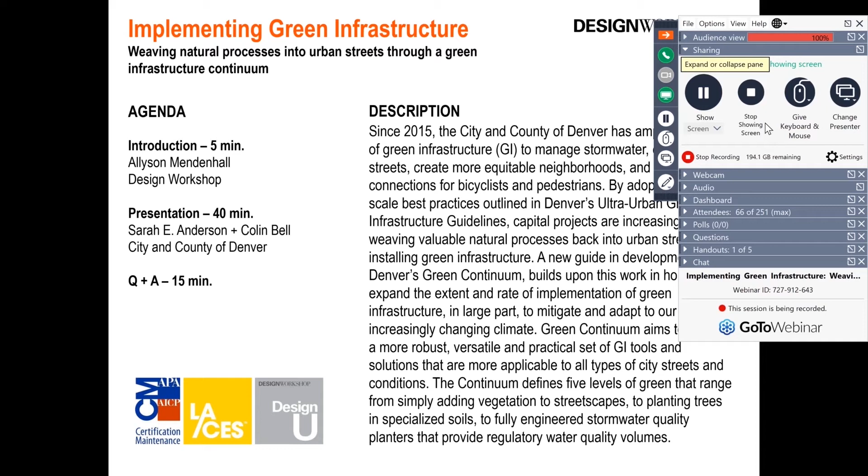When you signed up for the webinar, you saw these learning objectives. Today we will learn about the reasons behind the need for the Green Continuum, about the methodology and modeling behind defining different levels of green, and how the Green Continuum will be applied to city streets and capital improvement projects.

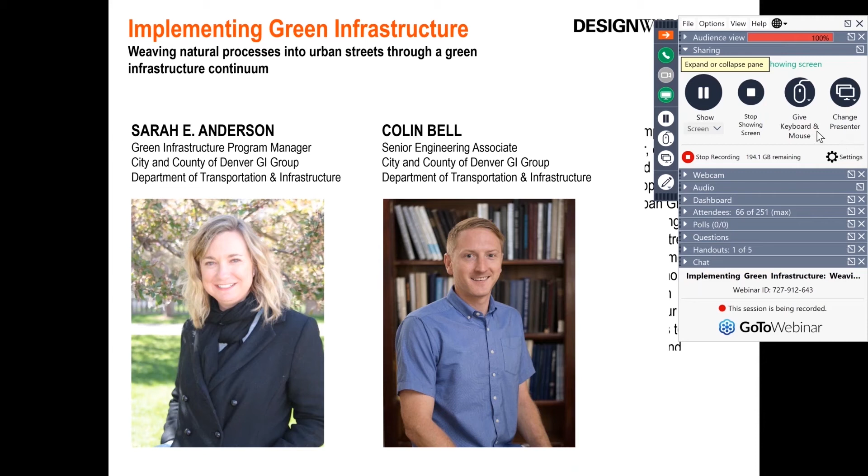Perfect. Well, thanks, Allyson, and thanks to each of you for taking the time to learn a little more about Denver's Green Infrastructure Program, a little bit about where we've been, and hopefully more about where we're headed. It looks like there's about 115 people on this, so hopefully it's an interesting topic versus you're just stuck at home.

So, a little bit about us. The Green Infrastructure Group is housed in the Office of the Executive Director for DOTI. We've just recently switched from being a Public Works Department to a Department of Transportation and Infrastructure. So we are housed in the executive director's office in a group with a fairly awkward acronym, OPLASI, which stands for Office of Policy, Legislative Affairs, and Special Initiatives. The Green Infrastructure Group, or GIG, which we think is slightly cooler than OPLASI, consists of myself, Colin, along with Brian Wethington, who is a landscape architect.

So we're a small but efficient group that is also heavily supported on any given day by a number of super smart consultants. The Green Infrastructure Group is mainly responsible for providing the direction for city decision-making on green infrastructure policy, green infrastructure programs, plans, and even green infrastructure projects. So we'll start pretty basic with what is green infrastructure.

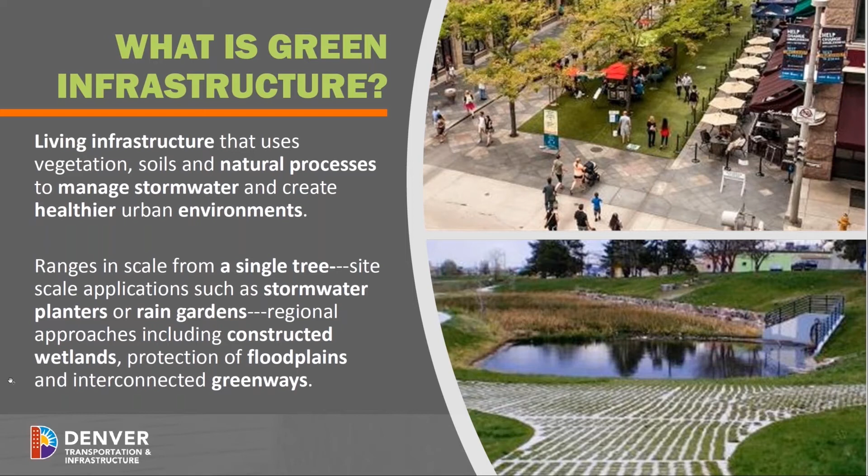So today we'll really focus mainly on the stormwater management and climate resiliency benefits of green infrastructure, but know that there are many. I think one of the most misunderstood elements of green infrastructure is actually the scales of green infrastructure. Green infrastructure ranges from a single tree to site scale practices such as stormwater planters or rain gardens, all the way up to regional approaches, which include constructed wetlands and protection of floodplains, as well as a system of greenways.

Green infrastructure works on all these scales in Denver and likely everywhere in the world. Each one of these pictures are recent projects completed in Denver, ranging from the site scale practices of the street-side stormwater planters on Colfax and Josephine to the planters on Brighton.

We also show sub-regional and regional facilities, one outside of a DPS school. And some of you at Design Workshop might recognize the aerial of the City Park golf course and the redesign, in which Design Workshop played a giant role.

I find that people think of green infrastructure as only in those smaller practices and really kind of pigeonhole green infrastructure into this idea of just rain gardens or green roofs, but they fail to recognize the flood control benefits of these larger regional scale green infrastructure systems.

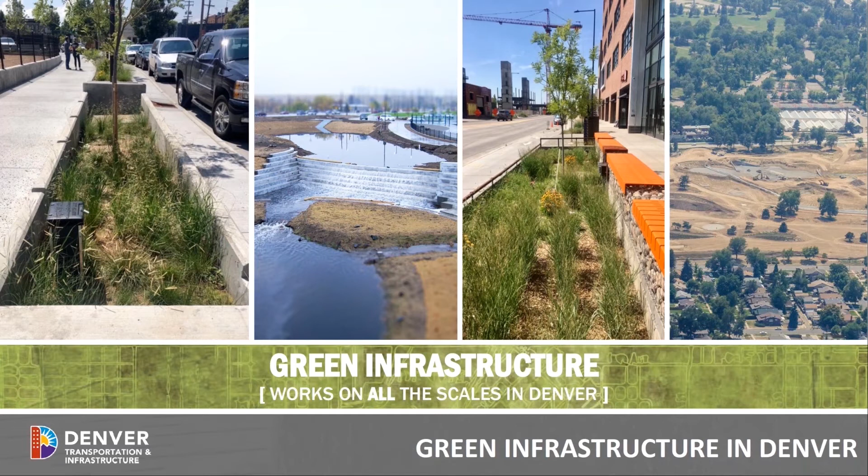And despite all of the benefits of green infrastructure, we're losing it, I think globally, but certainly locally at a pretty alarming rate. Currently, Denver is 49% covered in impervious surfaces, 72% of which is untreated, meaning that 72% of the runoff from those impervious surfaces makes it to a nearby waterway without treatment.

We recently completed, in 2018, a multi-year impervious cover forecasting model with CU Boulder that projected the impervious cover change in Denver and forecast that it would grow from 49% to 61 to 67% by 2040. That's the equivalency of 8 square miles of new impervious area. Obviously, this would have tremendous impacts on stormwater quality and quantity, urban heat, vegetation stress, and certainly community livability.

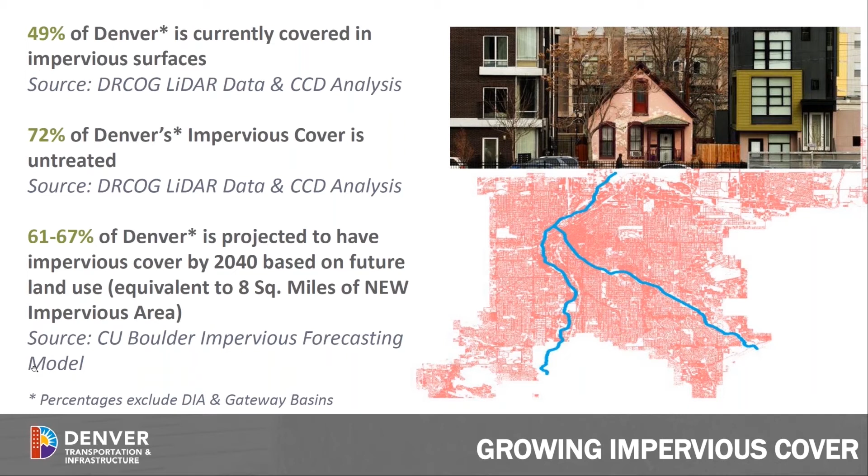The Green Infrastructure Group is really focused now—we feel like the stormwater management story has been told and is fairly well understood, but we're currently focused on trying to better tell the story centering around urban heat.

Denver has the third worst urban heat island numbers in the country. It's not as noticeable here as in other places because of the nighttime temperature drop when the sun goes down—I guess one of many benefits of being a mile closer to the sun. But it's a problem, and it's going to continue to be a problem and become an even bigger problem with those projected impervious numbers that we showed on the previous slide.

And so with the loss of green, we lose all those benefits—the loss of vegetation's evaporative cooling powers, and really just the pure comfort of being in the shade. I mean, I've said this before, I think in every presentation, but we all know the difference between not standing under a tree and standing under a tree, and how we feel and experience heat.

And then we compound those problems because we replace the green with these heat sucking materials that trap heat at the surface and then radiate it back. And this heats up the environment.

And then we cope with that, and our response to that is by turning up our air conditioners for those of us who are lucky enough to have those kind of systems and afford them, which then leads to greater fossil fuel production because that's how your air conditioner is powered, which leads to greater greenhouse gas emissions. And we end up in this giant negative feedback loop that we just can't seem to get ourselves out of.

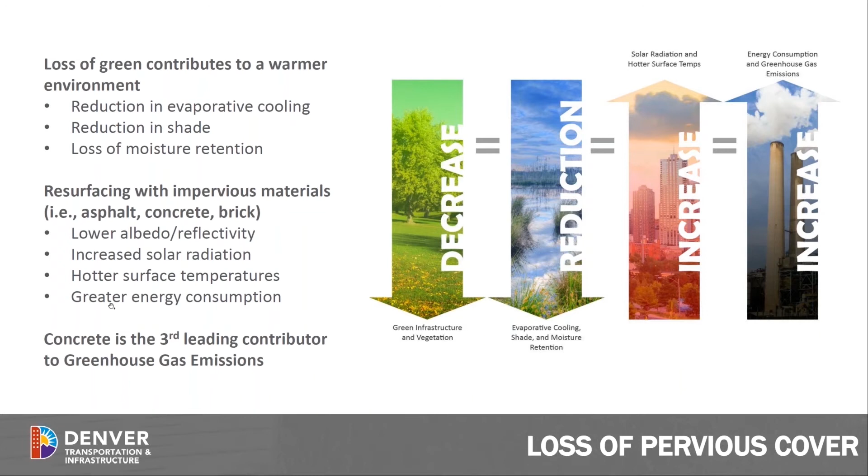We all know, whether in Denver or anywhere in the country, you feel it getting hotter. In Denver, we've seen a 2.5 degree increase in the last 50 years. As you can see in the graph, by mid-century we could have more than a month's worth of days over 95 degrees. Every time I say that, or look at that graph, it's hard to believe I'm saying that about Denver, Colorado.

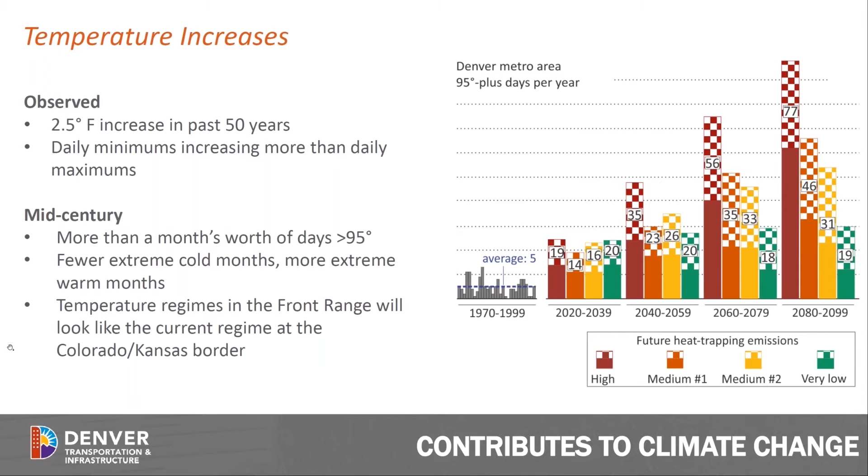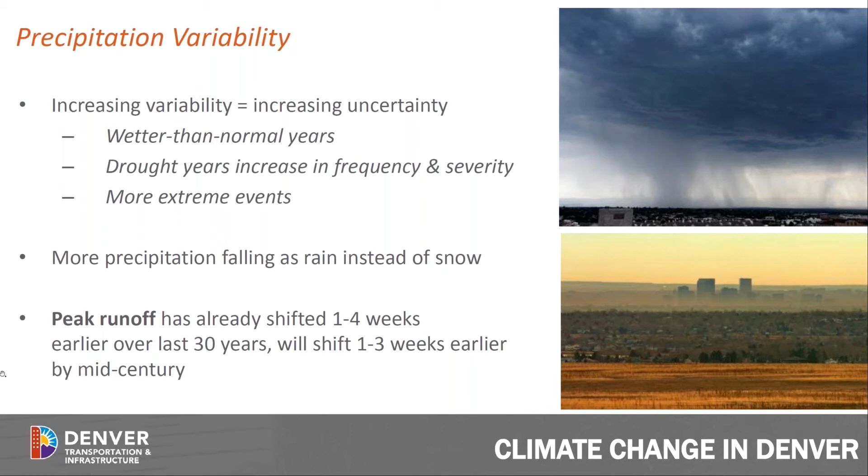With higher temperatures and warmer air, climate change models also forecast more frequent and intense storms, followed by prolonged periods of drought in Colorado. More of our precipitation will fall as rain instead of snow, and our peak runoff has already shifted up to 4 weeks over the last 30 years, and will continue to do so. In our conversations with Denver Water, that has a lot of impacts and logistical problems to be worked out for our water supply, storage system, and reservoir system.

The good news is that green infrastructure can really help mitigate the impacts of our warming climate. Tree canopy and other green infrastructure practices provide shade, which can block up to 70 to 90% of the sun's rays from reaching the ground.

Evapotranspiration is also at work. Leaves are little mini air conditioners, which remove the heat from the air and evaporate the water. We've had trouble getting to the bottom of this number, but I've read that this can really help reduce summertime temperatures by 2 to 9 degrees.

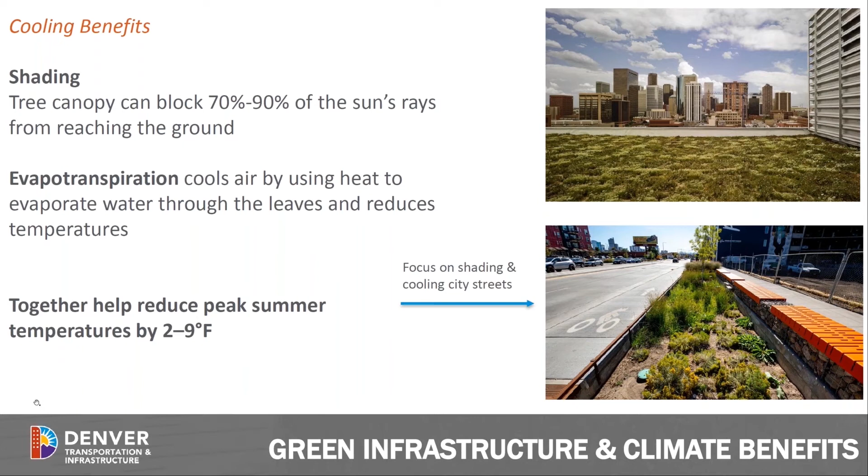Green infrastructure can also address the other big factor for Denver of climate change, which is precipitation variability. Green infrastructure can help manage stormwater by absorbing rainfall and reducing flooding and peak flows. You could also design these systems with drought tolerant, thoughtful, native vegetation that should be able to withstand both extremes. By doing so, we also reduce our irrigation demands and hope to recharge groundwater supplies.

You can see in the two pictures on this slide large-scale regional green infrastructure practices at work in Denver, handling precipitation variability. These pictures are of the Stapleton Greenway before and during the 2013 historic floods. Fortunately for Denver, the storm parked over Stapleton for about a week, and dumped about 11 inches of rain. Had it parked almost anywhere else in Denver, we'd have a much different story. But Stapleton was designed with these regional green infrastructure facilities to handle such an event.

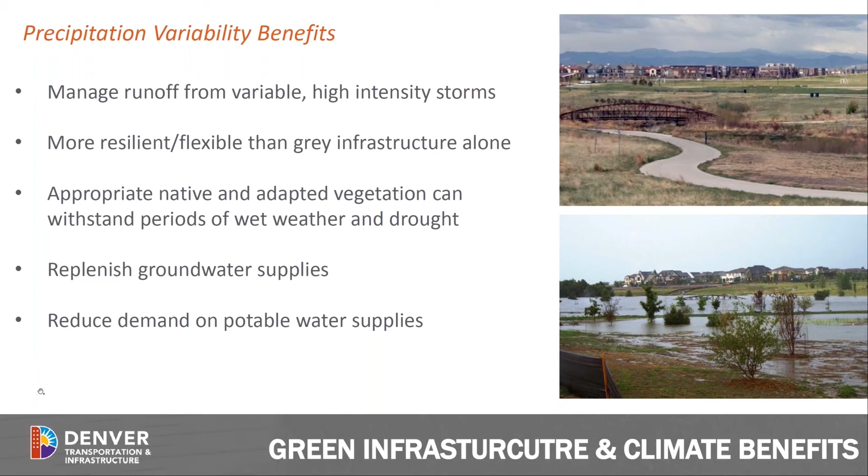Over the last 7 years, we've developed a number of planning initiatives to elevate Denver's use of green infrastructure, not only to manage stormwater, but also to create a more resilient and equitable Denver.

The first large planning effort we dubbed the scorecard. It was developed before green infrastructure had any dedicated funding for a capital program. This data-driven effort prioritized the basins in Denver most in need of green infrastructure based on a host of primary and secondary principles and data collection. The primary principles were focused on stormwater quality and quantity, while the secondary principles factored in things like park density, urban heat, and income levels. These were all problems within the urban environment that we thought green infrastructure could address in some way.

We collected all this data, threw it in a funnel, and came out with this heat map, which identified 6 of our highest priority basins, shown in red, along with 5 medium to high priority basins, shown in orange.

And so the scorecard kind of told a story that if the program had money, we knew where we would invest it first and the benefits that could be achieved. I'm proud to say this map was pretty useful and was really shopped around with executive leadership and to city council.

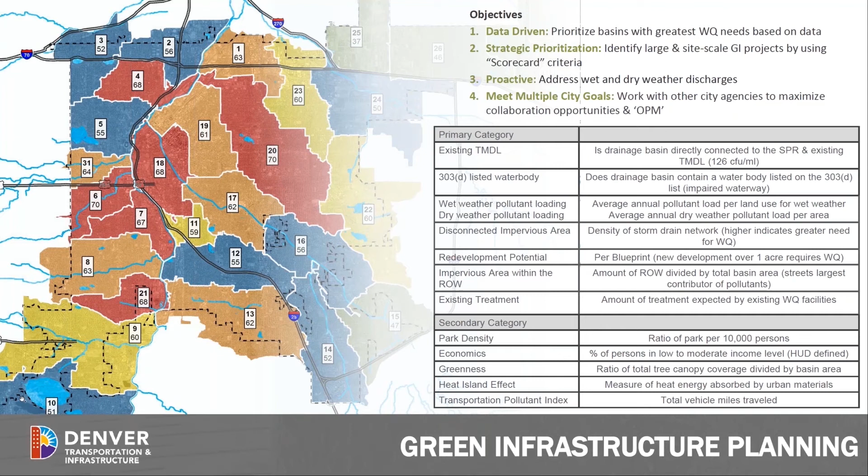Another planning effort that has been fairly successful was the development of the ultra-urban green infrastructure guidelines. When I started, Denver was desperately in need of guidance for BMPs more suitable for tight urban spaces. A lot of the guidance centered around BMPs that were more suitable for development sites and certainly not linear transportation projects. So this guide identifies a number of BMPs that are really suitable for those areas.

Through the development of this guide, I'm proud to say that we've completed, although we're a bit behind the times than the rest of the country, our first green corridor on Brighton Boulevard. It has over 100 street side stormwater planters, and we also have another 300 or so street side stormwater planters either in design or construction.

Together with the ultra urban green infrastructure guidelines and the scorecard, our next step was to create the green infrastructure implementation strategy. This document really is kind of our master plan, and it focuses on those 6 red basins and the 5 orange basins. It's really the only basins we took to this planning level. You can see the map on the lower right-hand side that identifies our regional opportunities.

We worked in partnership with our Parks Department to identify parks that would be suitable for these more engineered large-scale green infrastructure practices. And then you can see the yellow highlighted is where we've identified streets suitable for some of the practices outlined in the ultra urban green infrastructure guidelines. This really is leading how we prioritize our capital improvement program.

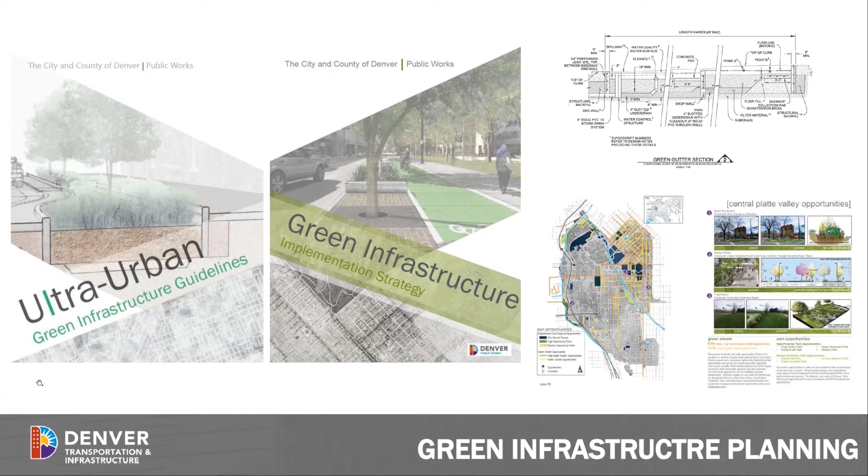Through these previous planning efforts, we have been pretty successful and built a number of green infrastructure projects, both through our program and as a city over the last 5 years. We try, and I think we've been successful on each project thus far, to always have a partner, in particular a funding partner. So we've been able to really stretch that $22 million, and we have a lot more money dedicated to green infrastructure by doing so.

However, as we build more of these projects, we find that they tend to be expensive. The design costs are high. They take a great deal of time, both from the design and construction standpoint. They can still have some utility or space constraints that are hard to overcome in our urban environment, and often lead to this kind of all or nothing approach.

So as a group, we've been focused on really thinking about simpler approaches, easier and cheaper to implement, that could more rapidly respond to our warming climate, because climate change is no longer if or when it will happen, it's happening. And so we want to ramp up our efforts, and what's the best way to do that?

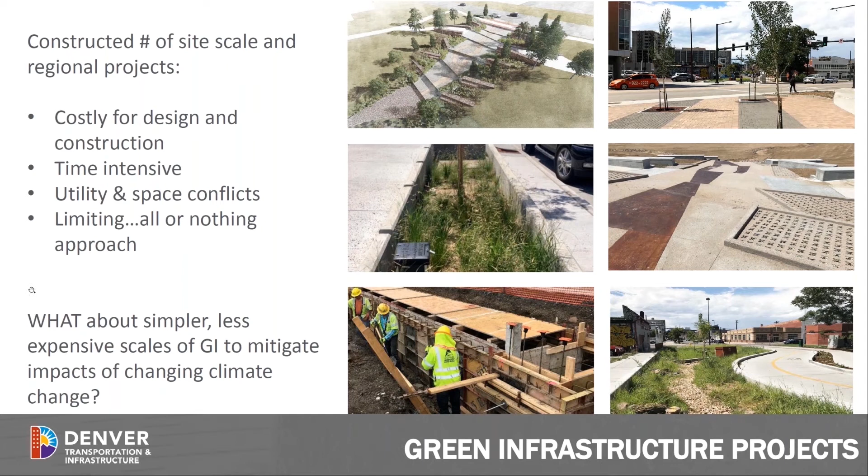And so while we do that, we also want to do a better job of defining all the co-benefits of green infrastructure, so that we can really stand up a greater citywide approach to implementation of green infrastructure to address our warming climate. And that's where Colin comes in. He's modeling the benefits of these smaller scale green infrastructure best management practices in a planning effort that we have dubbed the Green Continuum. So Colin, with that, I'll turn it over to you.

Thanks, Sarah. Right off the bat, Sarah introduced this concept of green infrastructure working across all different spatial scales. We always talk about the smallest scale being planting a tree, and the largest scale being the whole greenness in the urban landscape. In between those scales, at the city we have three thrusts of things we can do: we can work on sites, we can work in streets, and we can work on regional projects.

So those are the three bins we think about for green infrastructure, especially in terms of spatial scale. But as Sarah alluded to in the intro, there are other scales we can use to measure and evaluate our projects and help us select them. So I have a bunch of other scales we want to measure and quantify to show how green infrastructure is working.

For example, stormwater performance. If you think about volume retained at the city scale, a large regional pond with a ton of detention may seem to perform better than a tree. But at a smaller spatial scale, if you're standing under the tree canopy and the tree is intercepting and evaporating all that water, you start to think about performance a little differently. So within these spatial scales, there are all these other scales.

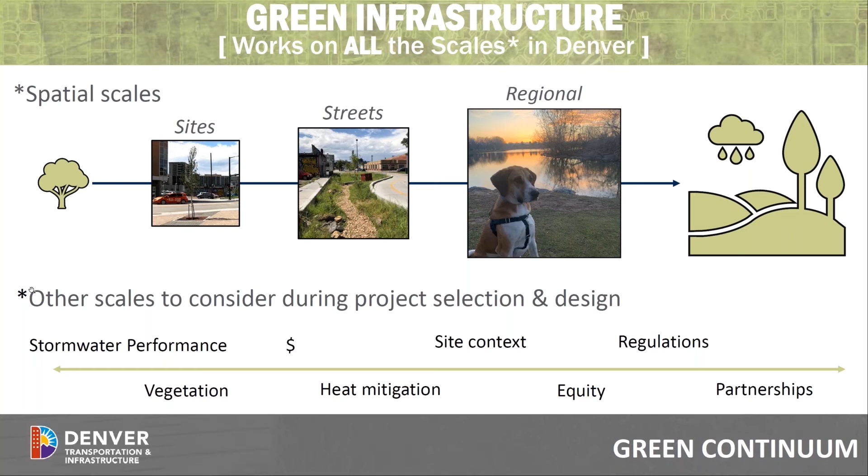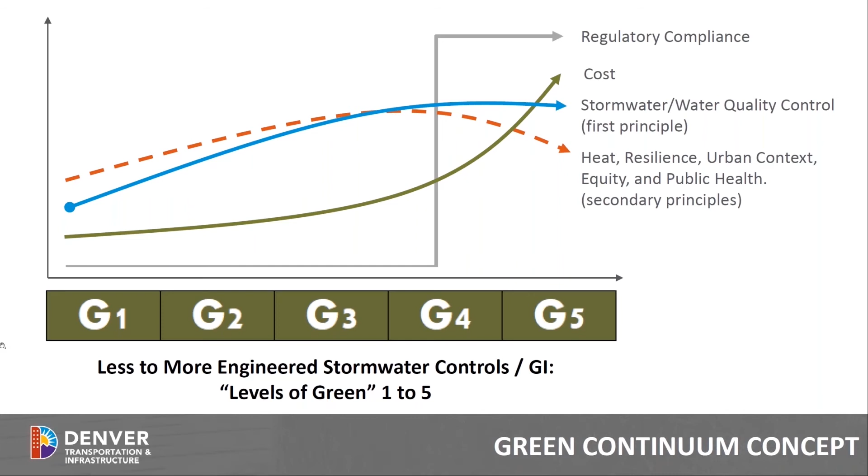So what I'm going to talk about today is that exercise of drawing that arrow, the blue arrow, for our first principle of stormwater, water quality, and hydrologic performance on our green continuum—beginning to quantify and put numbers behind that arrow.

The way we see it, we can start with design practices, things that we can do. The continuum is going to apply globally, but we're thinking about it in terms of streets and right-of-way projects for now. So what are some design practices we can include in our projects?

Things like, how do we maximize our pervious area and include healthy vegetation? How do we minimize our directly connected impervious area in our design? And then, how do we also provide some sort of storage—maybe surface and ponding storage, or water storage in the subsurface and engineered media. We see that conceptually we're moving from level of green 1 to level of green 5 as we build out these different design practices.

So the first part is to identify these things we can do. Then we want to quantify them as a site or project metric. If we were curious about designing to maximize pervious area, we'd quantify that with percent impervious cover on our site, and we can quantify the percent of impervious areas that are directly connected to our drainage system explicitly.

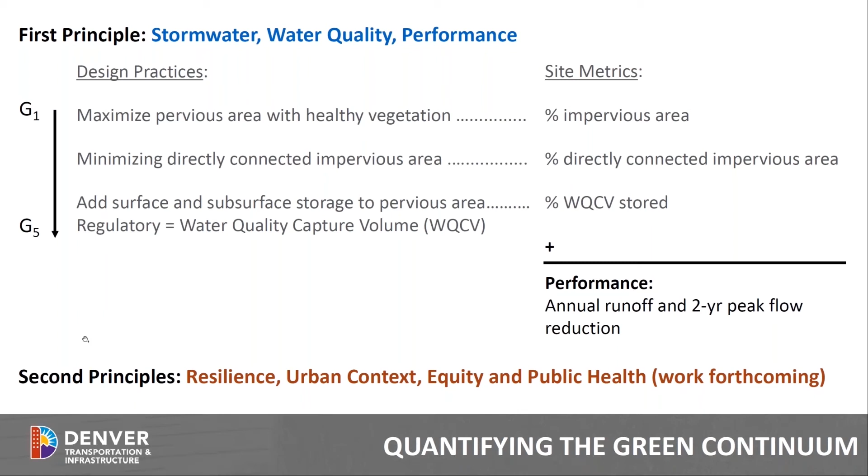So now even more specific, we did a modeling study to look at all of those quantities on the previous slide. The purpose of the modeling study was to look at our design practices and say these design practices fit into a given level of green. So we want to give a level of green for each of the design practices. That's the first outcome.

The second outcome is for all levels of green, even those that aren't regulatory, we want to show that they have value - hydrologic and community value. This modeling study was done just for streets and the right-of-way, but we have similar ongoing work for private properties, which we call sites, and maybe someday we'll build one out for regional projects.

So what we did is we chose a typical street cross section and a suite of design practices, and then for each of them, we quantified performance metrics: annual runoff reduction, 2-year peak flow reduction. We looked closely at the performance and said, how do these design principles separate, and how can we file them into our different levels of green?

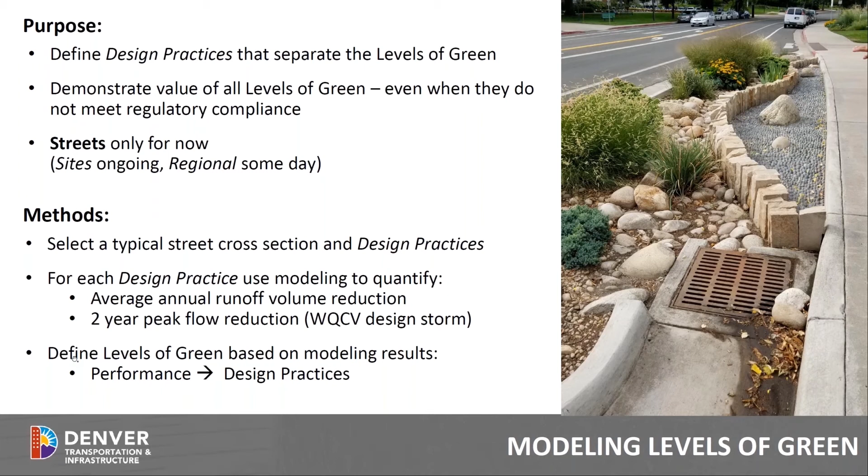So this is an overview, a plan view of the SWMM modeling that I did. SWMM is the stormwater management model, an urban hydrologic model. Basically, we took a plan view of a typical street, 400 feet long and 40 feet wide, and turned that into a SWMM modeling environment.

Runoff from the road moves down towards the gutter, where it moves along the gutter until it reaches the inlet. Similarly, rainfall that lands on the walkway moves through the landscape zone of the street to the curb and gutter, where it ultimately moves down to the inlet.

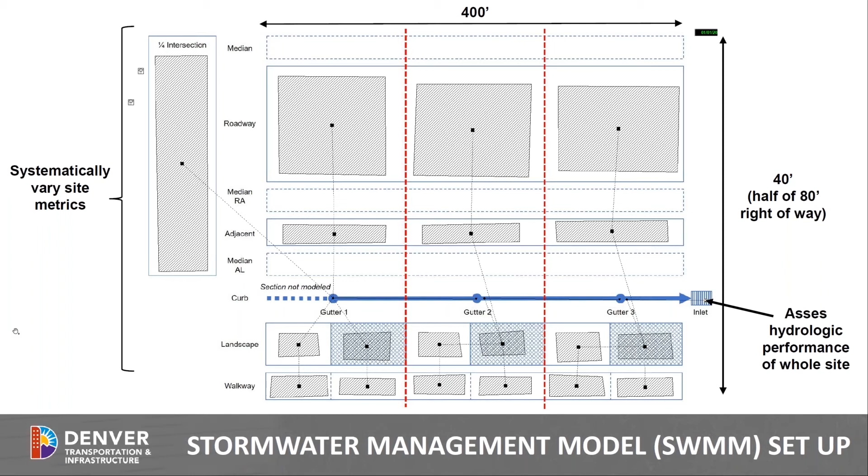With SWMM, we can systematically change the properties of this hypothetical road section so it reflects those site metrics and also reflects those design principles. So we can use it to represent our different principles, and then ultimately assess how our different landscapes perform, en masse, the whole landscape together, by looking at flows into the drainage system.

The types of design practices we integrated into SWMM were, as mentioned, first we looked at different levels of impervious area. The way we were able to conceptualize this in our typical street cross section is that our landscape zone, highlighted here with the red parallelogram, could look a number of different ways. It could be completely paved, as in the image in the top left.

It could consist of trees and tree grates. It could consist of trees planted in landscape islands that are not as small as the tree grates, but also not necessarily large, all the way up to a continuous, pervious tree lawn. Basically we varied how vegetated our landscape zone is across this gradient, influenced by forestry regulations and other design standards in the city of Denver.

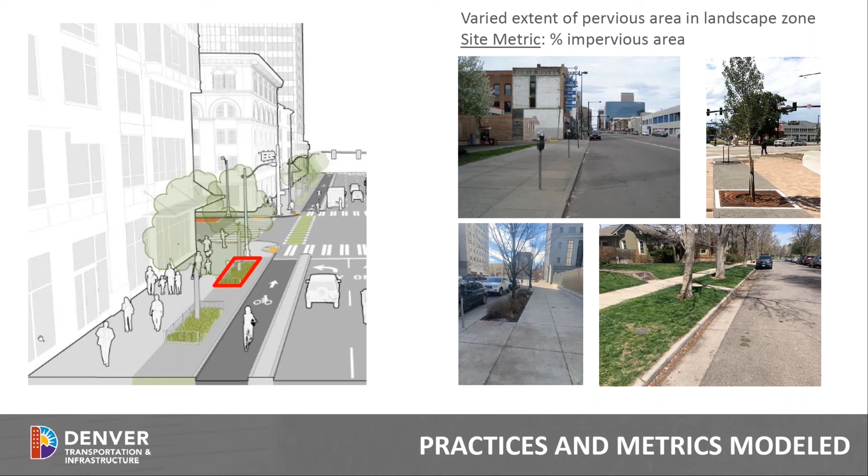So that's one thing we did. The other thing we did is, in addition to varying the footprint of the pervious area, we varied the depth and connectivity of that pervious area. If you look at the dashed red line, that represents a cross section in this right-of-way, and the cross section is what's shown in the diagram on the right. Essentially what we did is we tweaked this landscape area so that it existed at different elevations.

So we looked to see, what if the landscape area is completely hydrologically disconnected from the walkway - what if it's got a curb all the way around it and flow can't enter? What if we put this landscape area at grade with the walkway, so lateral flows could flow in, but there's no storage, so it would flow out on the other side? What happens if that landscape area is a little bit depressed, maybe 2 inches, maybe 4 inches depressed? How does that affect our runoff?

We also looked at depressing it so much that flow from the drive or the actual street could also enter the landscape area. What if the elevations were equally level, so that way flow would kind of flow in and out of the landscape area? What if we provided 2 inches of storage, 4 inches of storage?

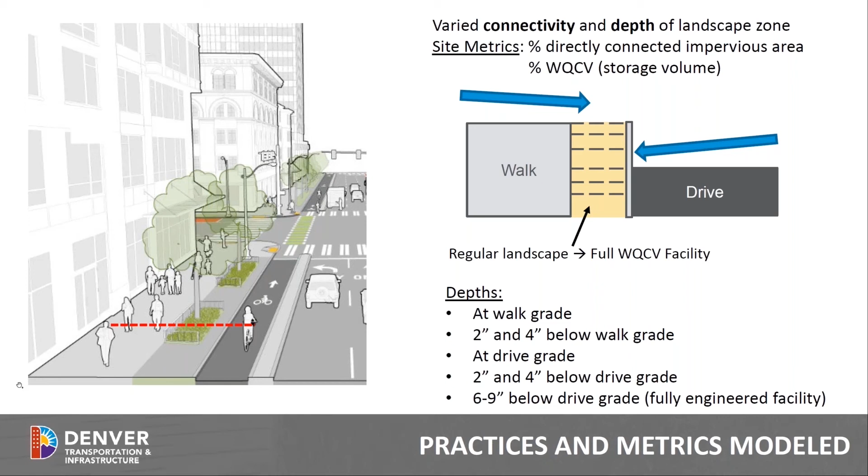All the way up to, what if we provide enough storage so that our landscape area becomes a fully engineered, street-side stormwater bioretention facility that meets engineering design guidelines? So a range of both the footprint of the impervious or pervious area, as well as the depth and connectivity.

We had a bunch of model simulations, shown here on the left. Each bar plot represents a different configuration of our pervious landscape area and its depth relative to other areas in the road. We quantified, over 10 years, what was the modeled reduction in runoff. By looking at these different interventions, we were able to parse out what defines different levels of green. That's what you see here on the right.

It's a synthesis of all those bar plots into conceptual levels of green. For example, the first level, G1 in gray: if we maximize our vegetated pervious area in the landscape zone, we can expect runoff reductions around 5 to 10% and peak flow reductions around 5 to 15%. That's our design principle for level of green 1 and its expected performance.

For level of green 2, if you connect your walkway to that pervious area, your performance in terms of runoff and peak flow jumps. Now we're at 5 to 30% for runoff, 5 to 40% for peak flow. That's level of green 2.

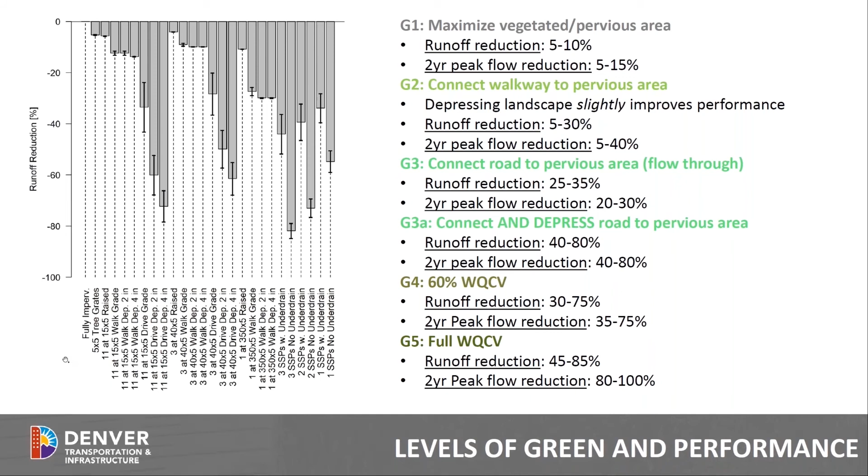Another finding: when you build these bioretention systems, or street-side stormwater planters, with under-drains, your actual runoff reductions are a lot lower, because the under-drains typically go to the storm network and collect this water, leaving less chance for infiltration.

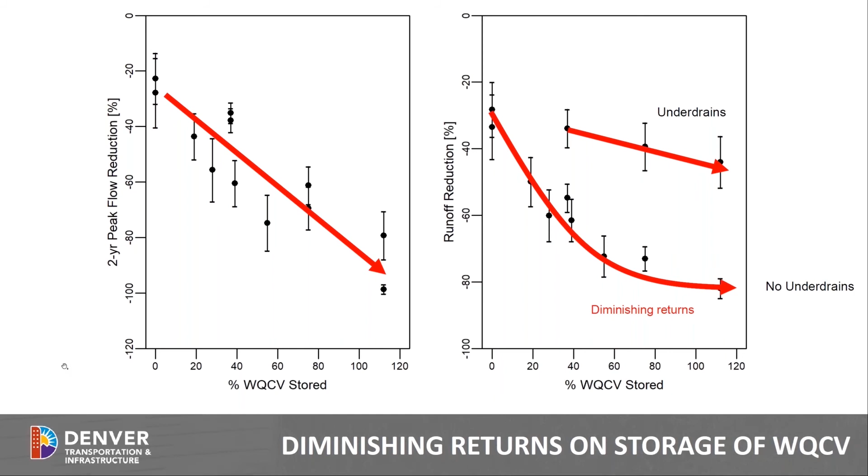Okay, so that's how we quantified the stormwater principle of the green continuum. Now let's talk about how we are, and plan to, apply the continuum to our streets. The first application was for city capital projects.

There could be 2 potential applications. One is that our Green Infrastructure Program could specifically fund construction of these facilities throughout the city. Another is that if there's a right-of-way project interested in green infrastructure, they now have this resource available to build a level of green 2 or 3 that they can give to their consultants.

Our plan is to get some of these installed with capital dollars, build them, and monitor them. If we see that these are really working and we feel confident about them, eventually we could turn it into policy where city projects aren't just opting into building a level of green 3 flow-through planter, but are required to. That's down the road though.

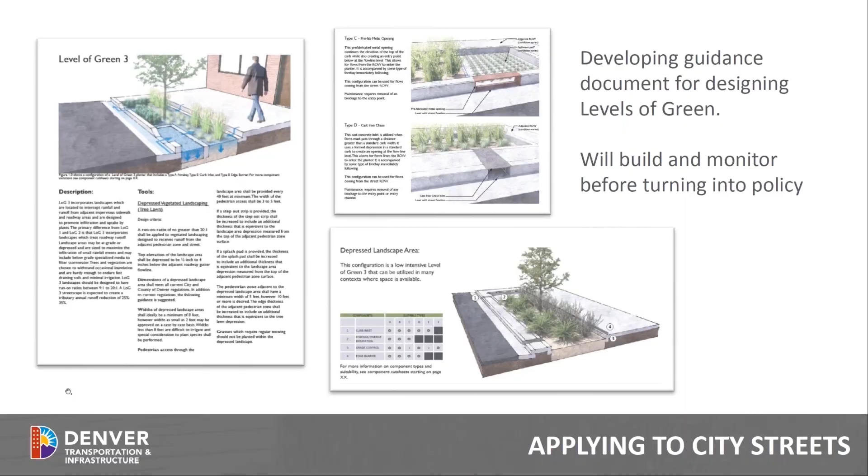In Denver, the Mile High City, we have this planning conceptual project called the 5280 Loop, a conveniently engineered 5.28 mile connectivity corridor linking different downtown Denver neighborhoods. This is an example of a project where there's going to be a lot of people. It probably won't trigger regulatory compliance, but that doesn't mean we shouldn't build in green infrastructure so it can provide all the stormwater benefits, urban canopy, urban heat, and resilience benefits we expect.

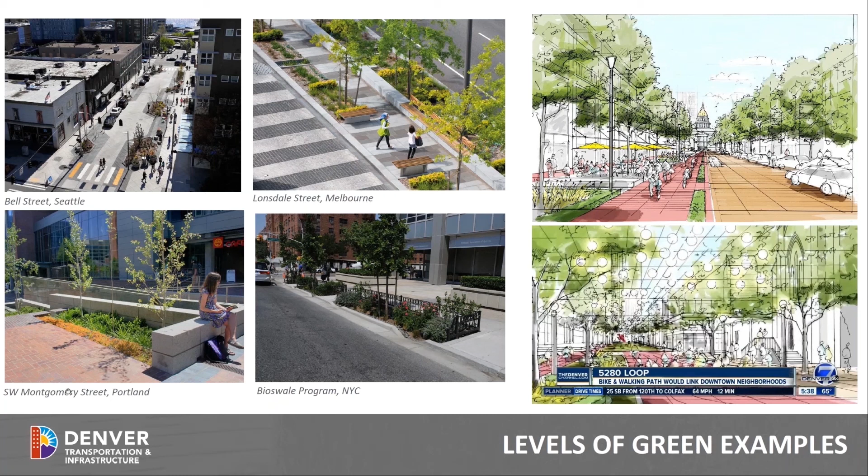That's one potential use of the continuum for street projects, and we also see it as a really good planning tool. We can look at all the streets in the city, and say, for example, there's a neighborhood with a large regional facility downstream but plagued by urban heat. Well, this would be a neighborhood really good for levels 1 and 2 interventions, those that increase canopy and provide some stormwater benefits, but maybe that's not the primary outcome.

Then there could be other neighborhoods in the city that have really dirty water with no regional facility, close to the South Platte River. So maybe these are streets that are better candidates for levels 4 and 5 designs that are really bomb-proof water quality treatment devices. We also see this as a tool to help us spread our program budget further.

Here's a comparative example for a level 2 versus a level of green 5. Sure, the modeling maybe showed that a fully engineered stormwater planter treats runoff 3 times better than our level 2 design concept. If that were the case, it would take 3 miles of level 2 streets to give the benefits of 1 mile of level 5.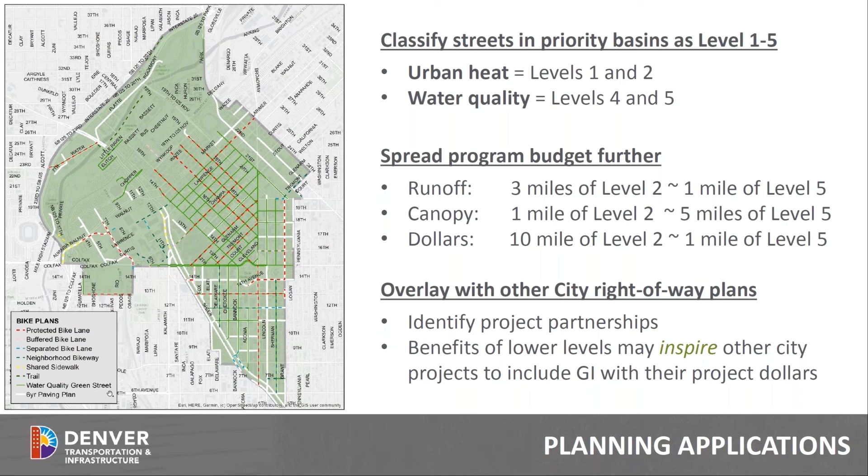That's the real dream.

As a program, we've had this goal of 25 miles of green streets for a couple years now. Basically, we look at a typical right-of-way and ask how much area is in 1 mile of it. For every time we can treat that amount of area with street side green infrastructure, we give ourselves credit for 1 mile of green. So if we can treat 8.24 acres of right-of-way with a planter, we say we've achieved 1 mile of green streets. We have this goal of 25 miles of green streets in 5 years.

That was adopted by the city engineer, and people are really excited about it. But if you look at this chart, we've been doing this since 2018, and we're super proud of what we've got done, but we're only up to 5 miles of green streets. Part of the reason is it's very costly and very difficult to provide full regulatory control to meet this goal.

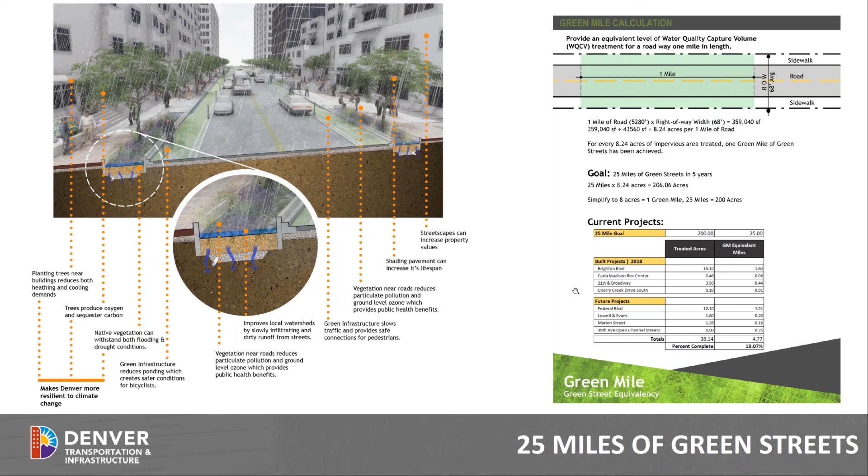So the way we see it is the continuum. It's also a tool for us to meet this program goal of 25 miles of green streets, if we acknowledge that a green street doesn't have to look like a street with deep planters. It could just be a space with green trees.

So finally, I spent a lot of time talking about quantifying that blue arrow, that first principle of stormwater. But in the near future, we also want to quantify other things. Sarah mentioned partnering with a local university to start to quantify the actual heat reduction benefits of our urban canopy, working with other offices in our Department of Transportation and Infrastructure on putting better numbers around our equity planning, and ultimately trying to build in livability and site context design principles into the continuum.

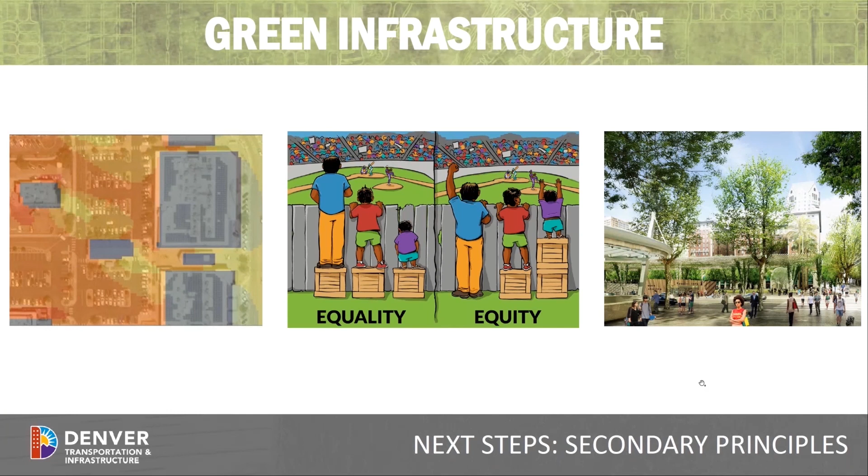Fine. This is great. Thank you so much, Sarah and Colin.

Yes, we do have some questions coming in, so I'll dive in and start to share some of those. Of course, we will capture all of these in case we don't get to everyone, and we'll get back to you. One of the first questions is, do you have metrics on the ROI for bioswales and rain gardens on public streets in terms of water quality improvements, heat island reduction, and improved human comfort and change in real estate values?

The short answer to that is no. We don't have the return on investment, certainly from the heat island or some of the other things you mentioned. The only thing we've done thus far is we have a monitoring program, so for the street side stormwater planters, we're currently testing 2 of our new sites, one on Brighton Boulevard and one at 21st and Broadway, to understand more of the stormwater metrics. But that's something we're trying very hard to at least set up the next steps for, so we can start to have metrics associated with the co-benefits of green infrastructure.